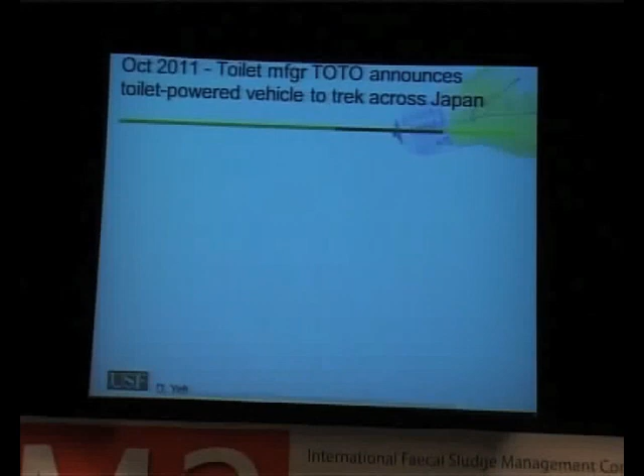And last fall, the Japanese toilet manufacturer Toto announced that they have developed the first human-powered motorcycle, if you will, that can travel across Japan. And this driver looks like he's about to make a deposit to power the vehicle. Now, is this really true? I'll get to that later.

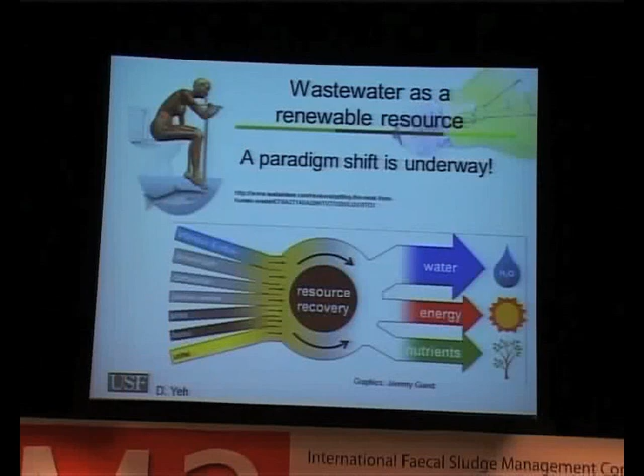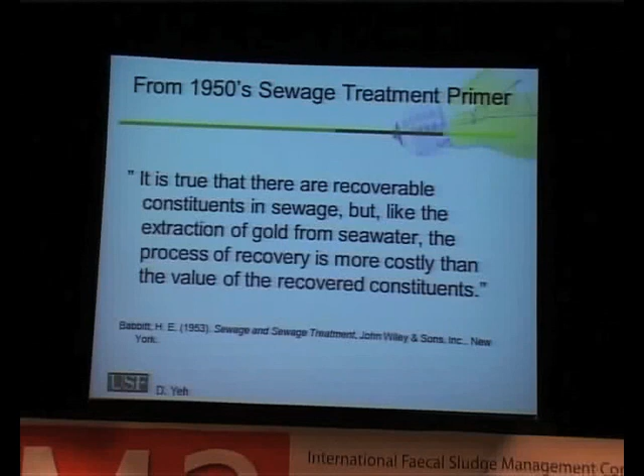Okay, so we recognize that wastewater or waste material should be viewed as a renewable material, and there's a paradigm shift that's underway, recognizing that we can harvest waste and turn that into water, energy, and nutrients. We found this in a really old wastewater treatment textbook, and it says it's true there are resources in sewage, but like the extraction of gold from seawater, it's very costly, and it's not worth it. But we'd like to challenge that assumption again, given that there are different technologies and the world's different these days.

So I think for us to achieve the Millennium Development Goals, especially related to the targets on sanitation, we need to develop different technologies, as many of us are talking about here at this conference. And here are a number of properties I think that really need to be embedded in these technologies. But probably the first one, and that's what the Gates Foundation and many other organizations realize, is that we really need to focus on recovery rather than just removal, and recognize the value that's embedded in the waste material.

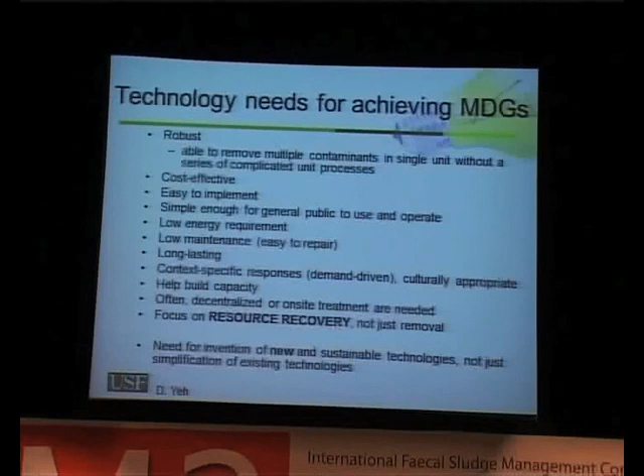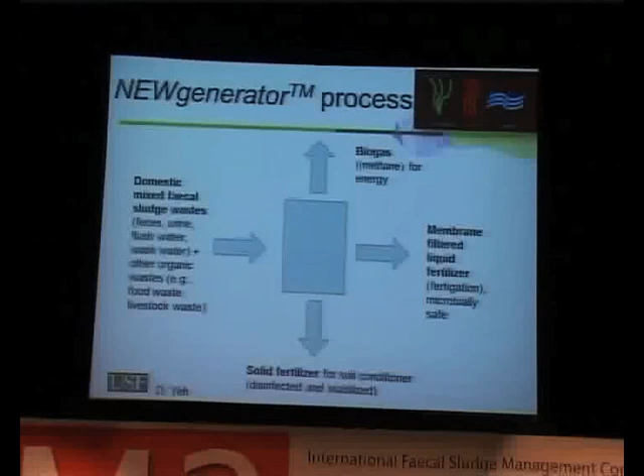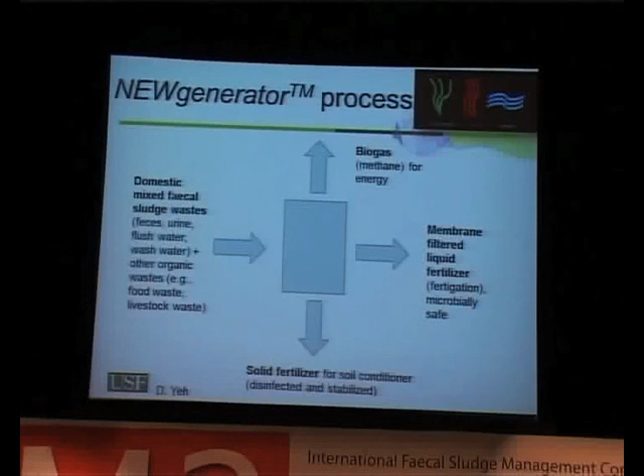So here's sort of our process in the box. What we envision is a one-step device that can turn mixed waste, whether you have pour flush or a variety of sources, you have food waste, other things mixed in, but really mixed waste from different sources. And through anaerobic digestion, you can recover biogas, but the difference is that we're going to apply membrane separation on this process. And this, I think, will be a key parameter for the process.

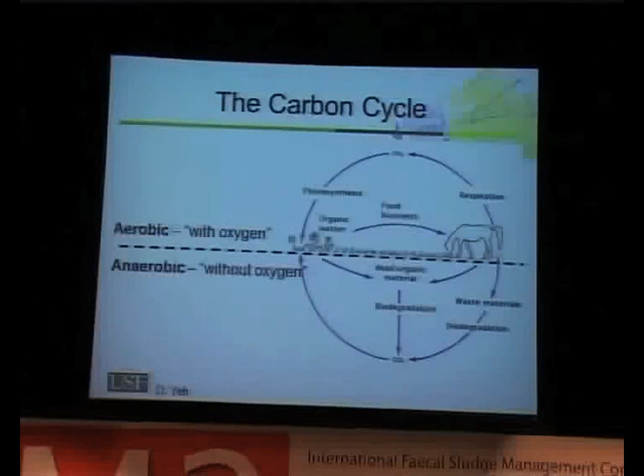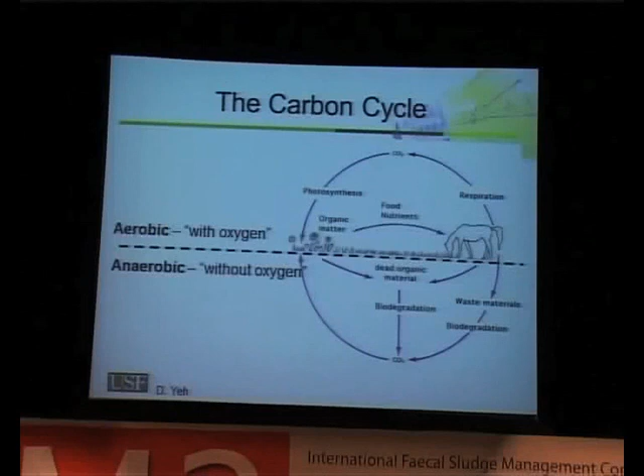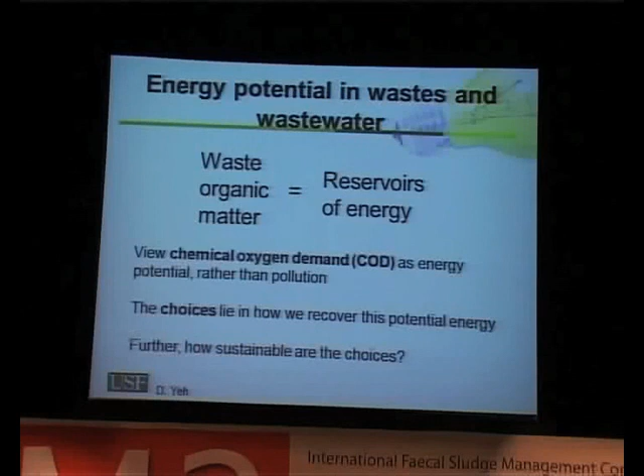Okay, so let's go back to the carbon cycle. And this is something that we learned very early on, but unfortunately, a lot of people forget. So basically, carbon goes around and around the Earth, is mediated by microorganisms, is biogeochemical cycling. And the fact is, what we consider waste is really food for a variety of microorganisms. So in nature, there's really no such thing as waste. It's all food and energy source for organisms. So waste organic matter is equal to reservoirs of energy. So this parameter that we're familiar with, chemical oxygen demand, really, the more polluted, the higher the COD, the more energy there is within waste material.

Okay, so if we look at this world of carbon, I'd like to look at methane being the most reduced form of carbon possible, and carbon dioxide being the most oxidized form possible. You can view methane as very energetically rich, whereas carbon dioxide is completely devoid of energy. And the rest of the organic world falls somewhere in between. And that could be biomass, the food we just ate for lunch, could be fecal sludge. They fall somewhere in between here.

And you see that through anaerobic digestion, we can basically convert the biomass to methane. But then there's a natural oxidation process of respiration, and it gets converted to carbon dioxide again. But thankfully, there's a mechanism called photosynthesis, which basically converts this energetically useless carbon in the form of carbon dioxide back into useful carbon, with the power of the sun. So this carbon cycle continues. I think this is really important for us to keep in mind as we're looking at technologies that can harness energy and resources.

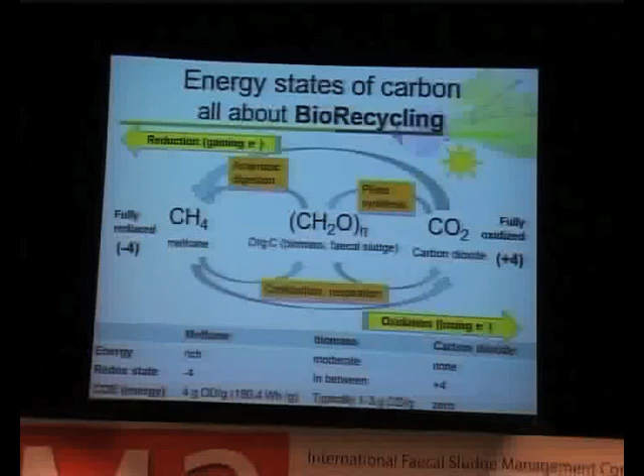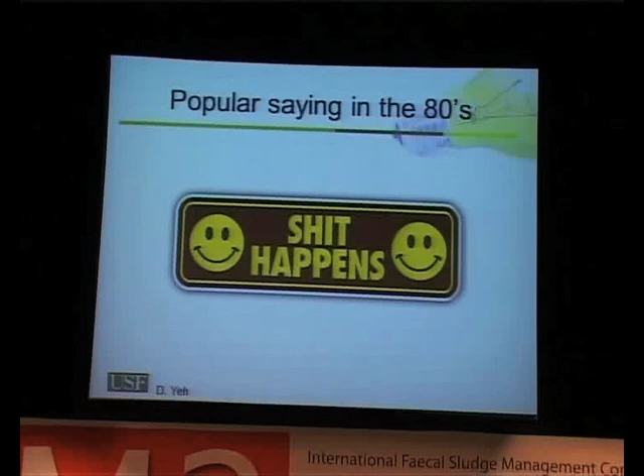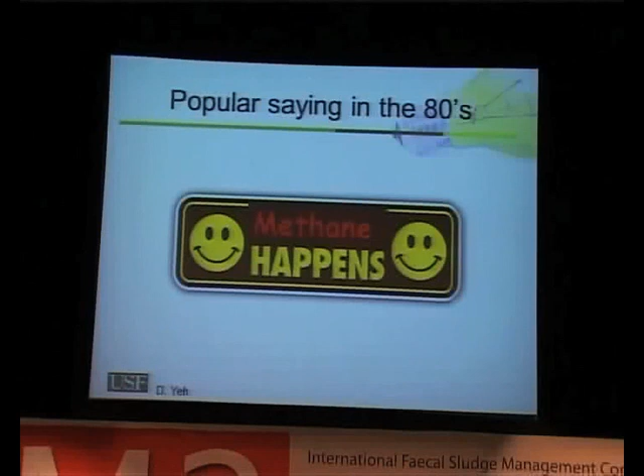Okay. So there's this very popular bumper sticker or T-shirt that floated around in the 80s, right? And I like to think that after this happens, this also happens. And so really the bumper sticker could be modified to say methane happens. That's true. Methane happens, and in fact it starts to happen within our digestive tracts, and once it enters the environment, if it's anaerobic, it continues to happen.

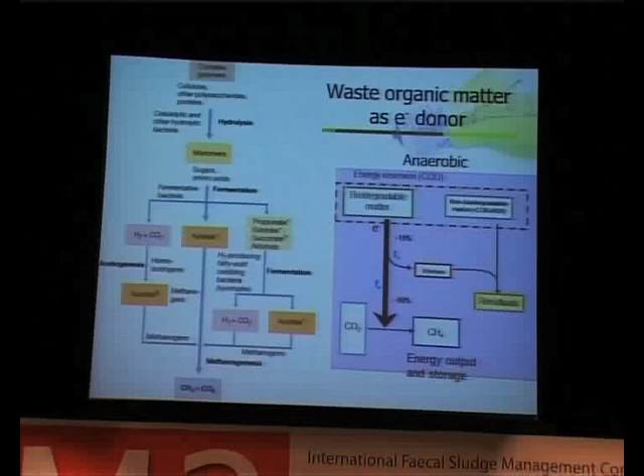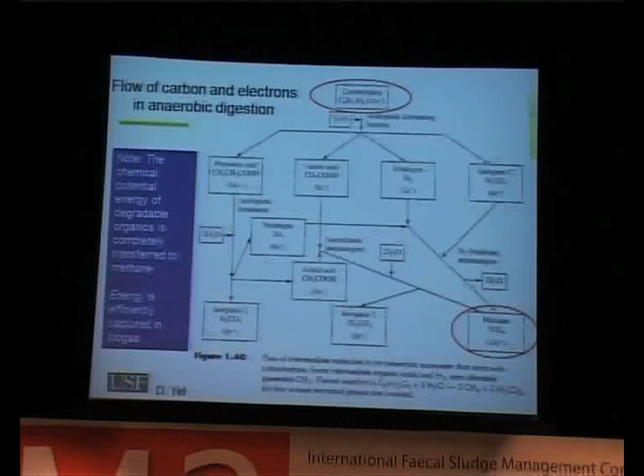And anaerobic microorganisms are very efficient at converting organic matter into methane. And compared to aerobic organisms, they have very little cell yield, so they're very unselfish. They take a very low commission, if you will, to build biomass. They convert about 90% of the energy into methane. If we're looking at energy recovery on an electron basis, for every bit of biodegradable organic matter, we get all of the electrons back, eventually in the form of methane. So, when we're looking at technologies, anaerobic digestion, methane production is something that works well.

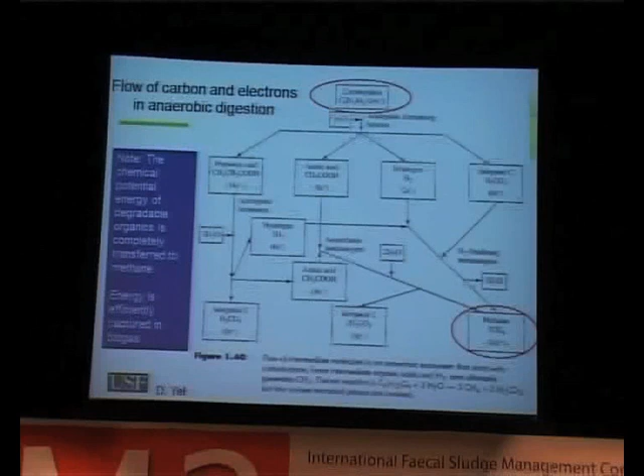There's a saying, if it ain't broke, don't fix it, right? So let's look at anaerobic digestion and say, well, what can we do to make that better? In terms of the energy content of wastewater waste, municipal wastewater in the United States is relatively dilute, so the energy content is limited. However, fecal sludge with a high solids concentration would be a lot more energy rich. Of course, the more COD you have, the more energy embedded.

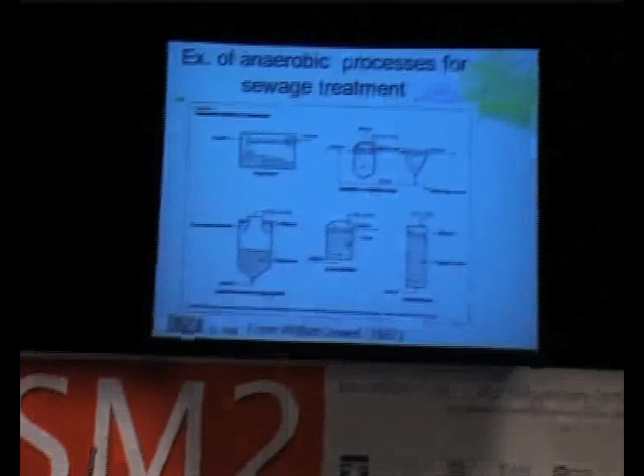And a variety of anaerobic wastewater treatment processes have been in existence for a long time, which you're familiar with. In India, there's a large public toilet, in fact, that converts human waste into biogas, and then biogas used for cooking, or lighting, or also electricity. So here's a good example of turning waste to energy via biogas.

But what are the limitations of anaerobic digestion? Well, one of them, I think, is related to the reuse of the effluent from anaerobic processes. If you're relying on gravity settling, gravity separation, which many processes do, there's an inherent limitation that anything that's at density close to water, such as colloidal material, or microbes, or bacteria, or even helminth eggs, could leave the system, and we can't capture those through gravity-driven separation systems and anaerobic digestion. So that puts a limit on what we can do to safely reuse the effluent from these systems.

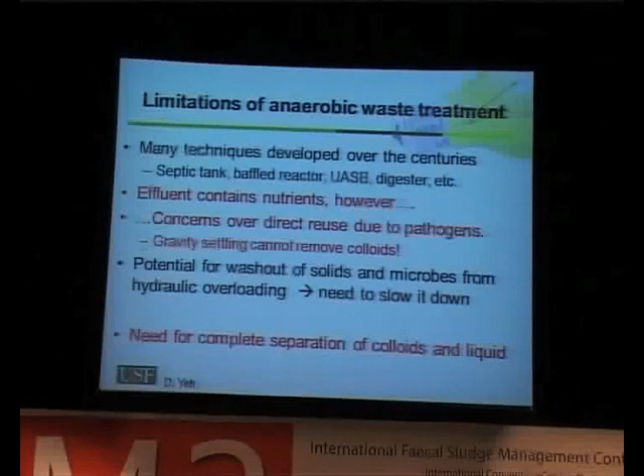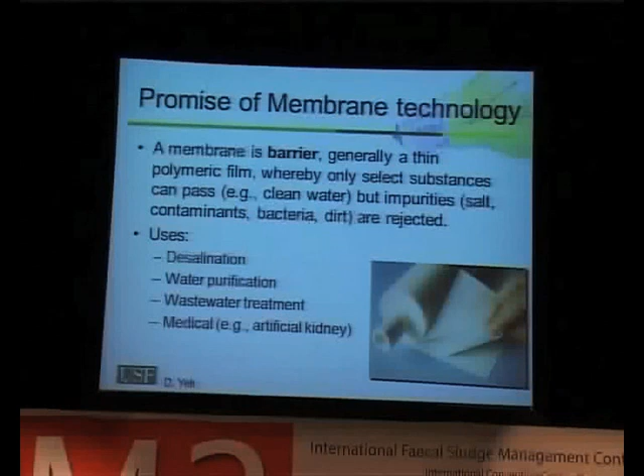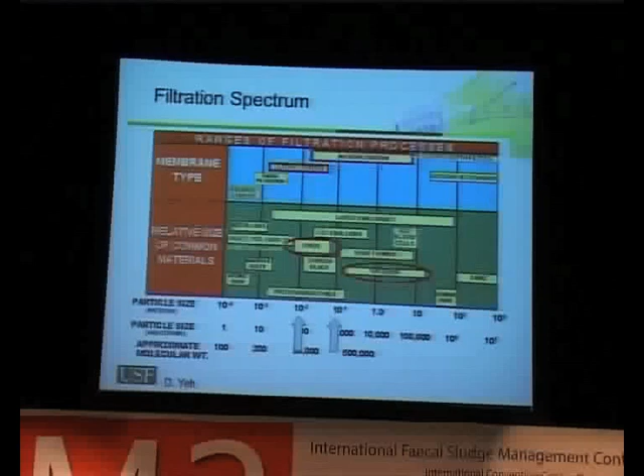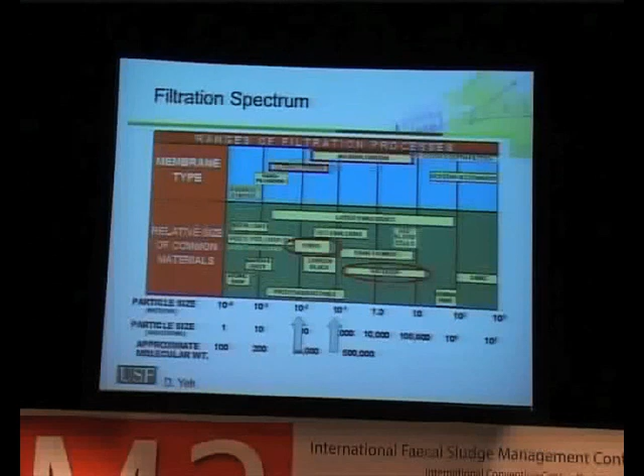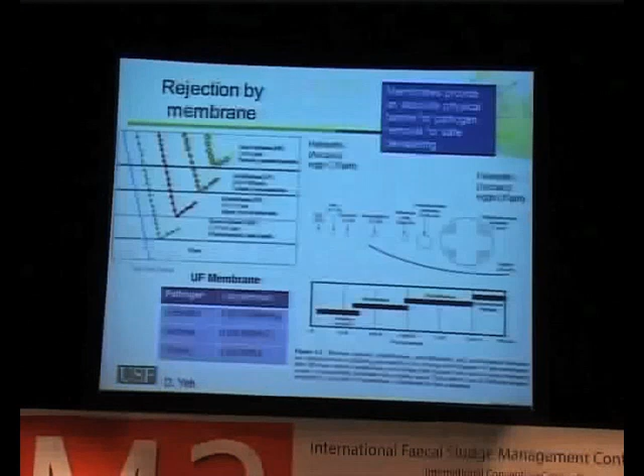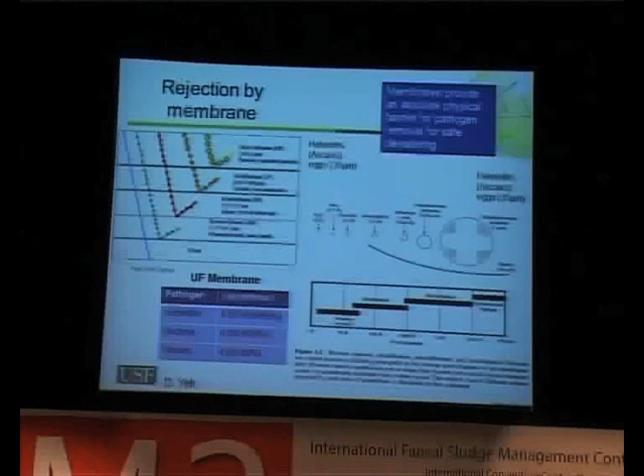Looking at it a little bit differently, this is basically the same information, but presented in terms of the different types of filtration, what they can reject. The top one on the graph on the left shows microfiltration on top, and then ultra, nano, and then the reverse osmosis. Well, the average size of a helminth egg is about 35 microns, and that can be easily rejected by microfiltration. But beyond that, we can also reject bacteria and viruses. And one thing that's very interesting is also when membranes are put in use, the pore size sort of tightens, if you will, because of the covering of the membrane surface with biofilms. And that's a research area that's ongoing now. That we can get even additional removal with the membranes that are in operation.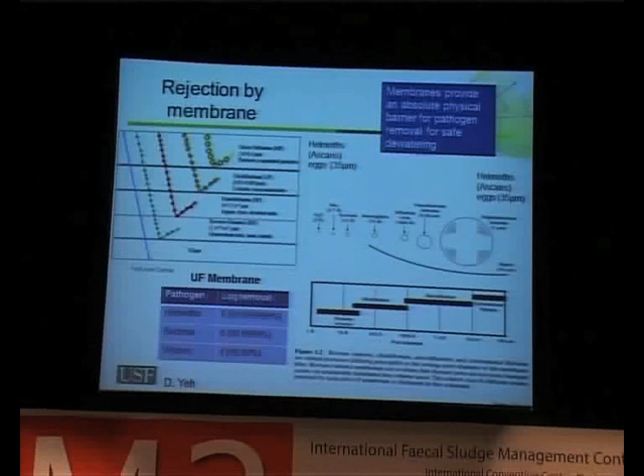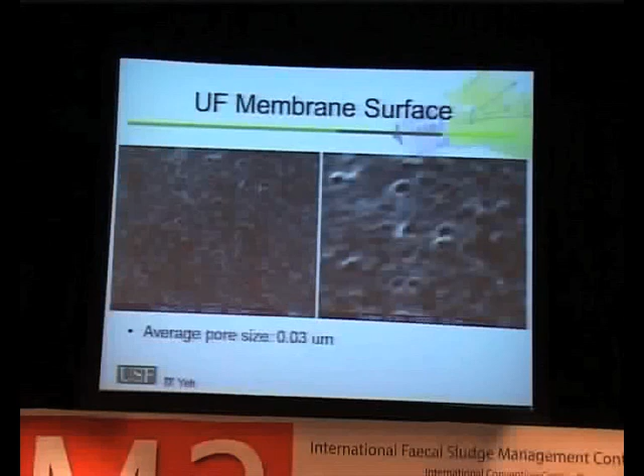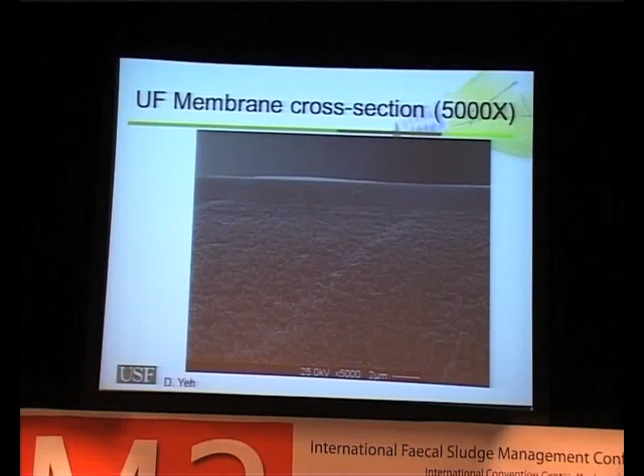Here's an example of the membrane surface of the membrane that we're using. You can see the pore size in images from the scanning electron microscope. Average pore size is 0.03 microns. You can look at the membrane surface with atomic force microscopy, showing the roughness on the membrane surface. And here's a cross-section of the membrane. You see on the very top, that's a separation layer. It's a very dense layer, and then the pore is going to open up. That's to allow water to go through once it makes its way through the top layer of the membrane. So membranes are very robust, very flexible systems. They're highly scalable. They provide this absolute barrier for the rejection of a variety of undesirable contaminants.

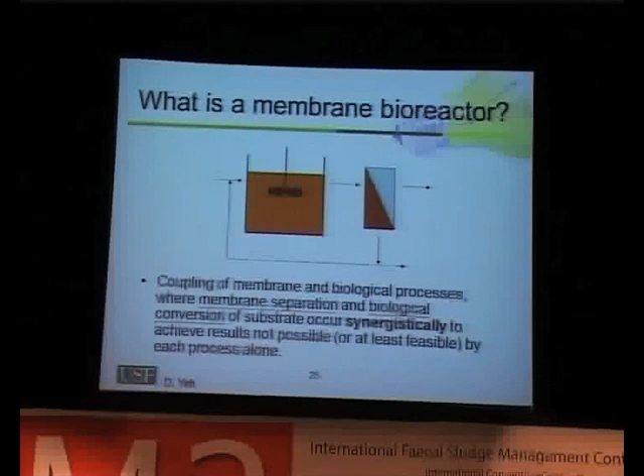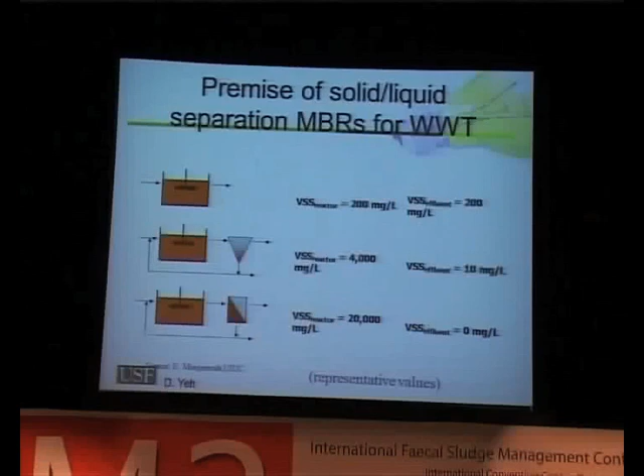So we can combine membrane with a bioreactor, a biological process, right? That's what we would call a membrane bioreactor. So what do you do with a membrane bioreactor? If you start with a CSTR, or a completely stirred-tank reactor, and this could be, for example, a fecal sludge pit, whatever goes in, if it's complete mix, is what comes out. So there's very little differentiation or separation for contents. Of course, we can add a clarifier, a gravity-driven clarifier to that. We get some separation. But as I noted previously, that colloidal material will not be able to settle within such a system. But if we apply a membrane system, now we're going somewhere. We can get basically 100% removal of solids. Not to mention that we now can create a wastewater treatment system that is very compact. For example, we can replace this entire wastewater treatment train with really a small one-step system. And there's a number of applications to the membrane bioreactor systems, MBRs. Some of the issues are related to energy and maintenance of these systems, and I'll get to that more in a minute.

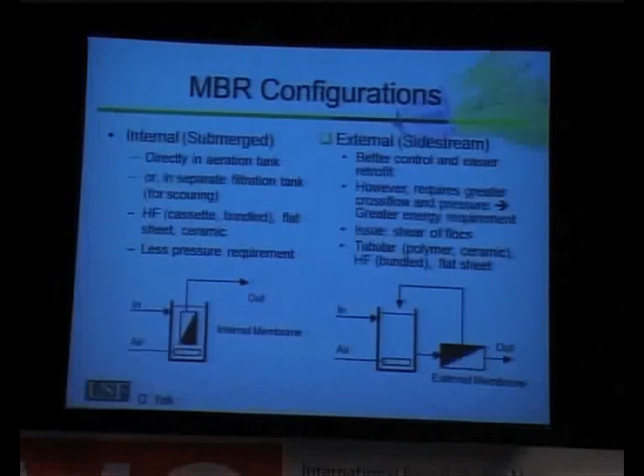So where do you put the membrane? You can either put the membranes inside the reactor, and these are submerged configurations, or you can put them outside, external configuration. Right? Keep in mind what I've spoken so far about membrane bioreactors really are related to the aerobic systems. These are basically activated sludge systems adapted to using membranes.

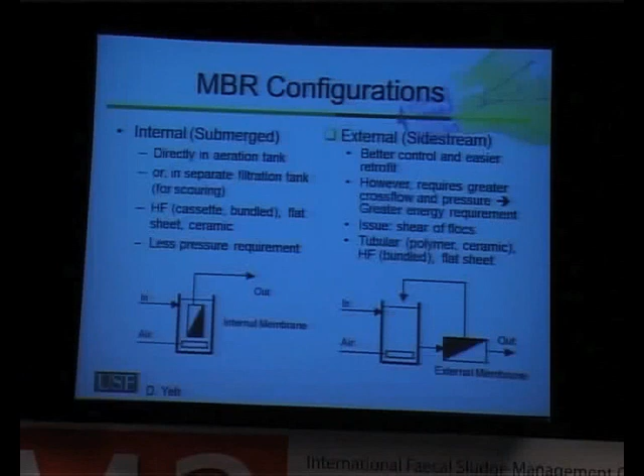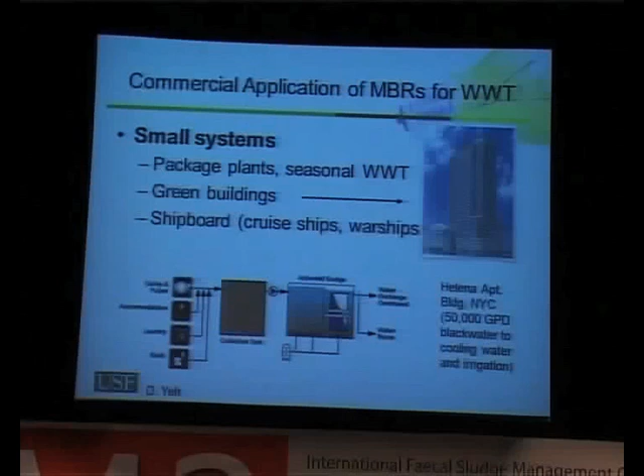What we're interested in working on is an anaerobic membrane bioreactor. Membrane bioreactors have really penetrated the commercial marketplace. These are systems that are in commercial use. There are a variety of companies that provide these services. They're small systems. You can use them even inside buildings.

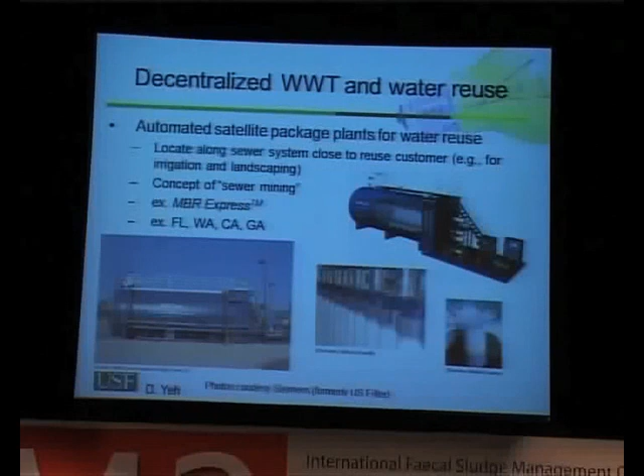There are a variety of green buildings that recycle the building's wastewater and convert that into reusable water within the building. We can even use these on ships, for example. There are cruise ships that use membrane bioreactors to turn all the wastewater into usable water. So these are basically systems that are high performance, small scale, and can provide a high quality effluent that can be reused. Some of the top uses have been, for example, sewer mining, to mine water from sewers.

There's a lot of excitement around membrane bioreactors, and this one came from, I believe, 2004, from the Water Biotechnology magazine. They're very excited about membrane bioreactors, and asked the question, can MBR solve the world's water crisis? This is a summary of a meeting with a number of wastewater experts. They identified that MBRs have a lot of potential, and in blue are the benefits highlighted. They provide really high quality effluent. There's reliability. It's a good use of land because they're compact, and they're very adaptable.

They're small systems. But what are the issues with MBRs? If we want to make these actually a solution in the global water and sanitation fight, what are the issues? Well, cost. These tend to be expensive systems, requiring a lot of components and a lot of know-how to run. There's a chemical cost to clean the membranes, an energy cost to run the membrane system and the bioreactor system, and also a general lack of familiarity with the system.

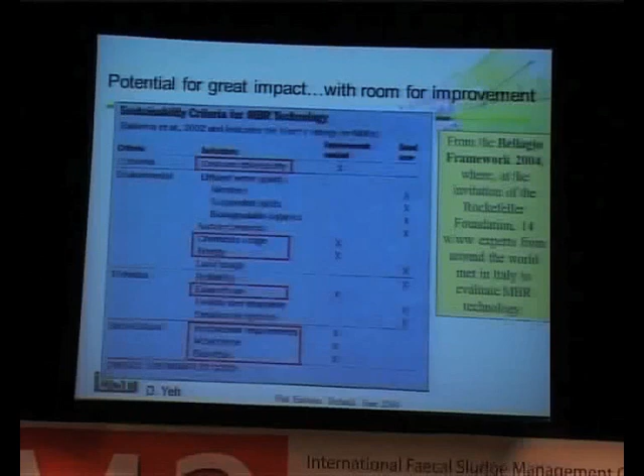This has basically provided the motivation for the work in my research lab for about the last 8 to 10 years, basically this table. If MBRs have such potential to help solve the world's water crisis, are people really looking at these issues? Unfortunately, I think most of the marketplace has been going towards users who can afford MBR systems. What has been sorely neglected is the sanitation market in developing countries, and commercial vendors are not targeting that sector. I think that's a shame, that we have such a wonderful technology but it's not being applied to help solve global sanitation problems in the developing country context.

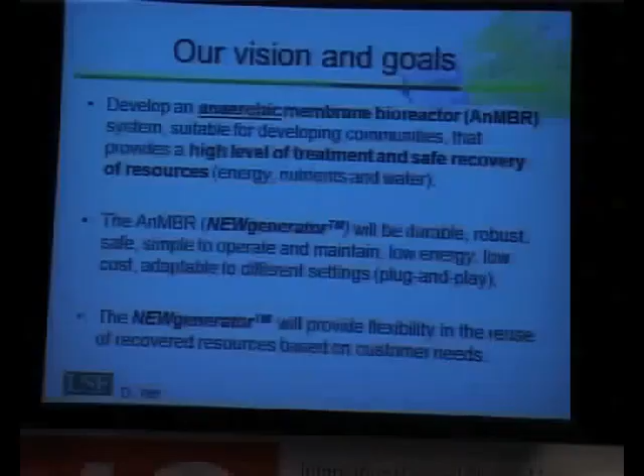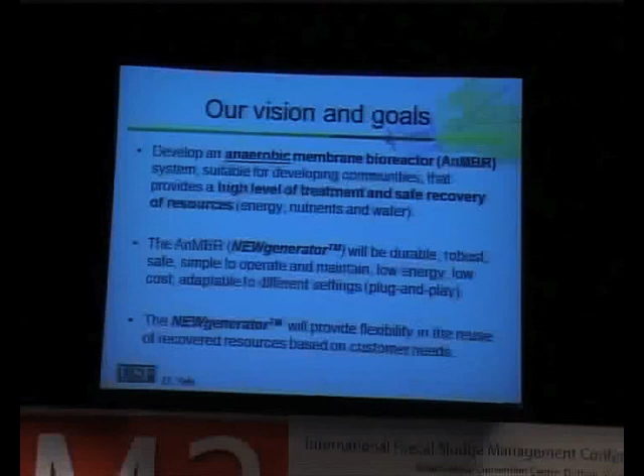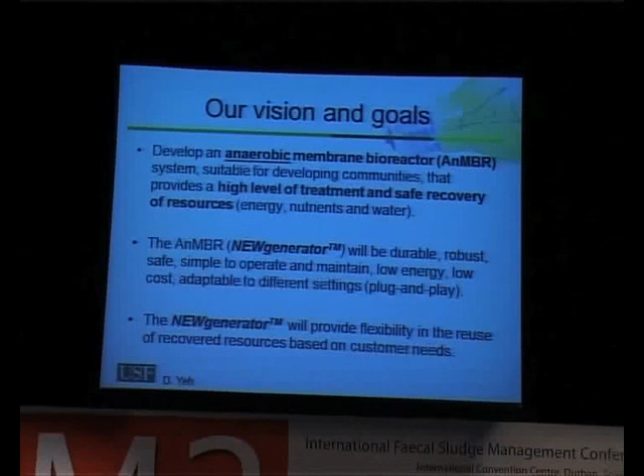So what we envision is that we'd like to develop an anaerobic MBR system that's appropriate for resource-limited settings. The reason we want to do this anaerobically is for the energy reduction in an anaerobic system, and also for the energy recovery aspects. The trademark name we have applied to our system is the NEWgenerator, and we envision that it will be simple to operate, low energy to maintain, and adaptable to different settings. We can adapt to different energy sources that are available, or even be completely off the grid. And the recovered material resources can also be flexible depending on what the user needs.

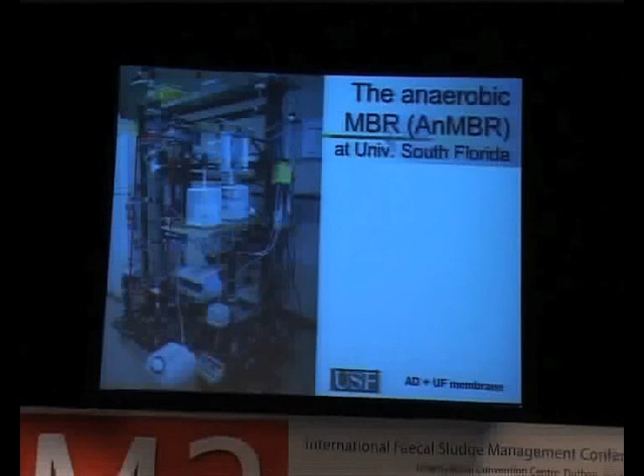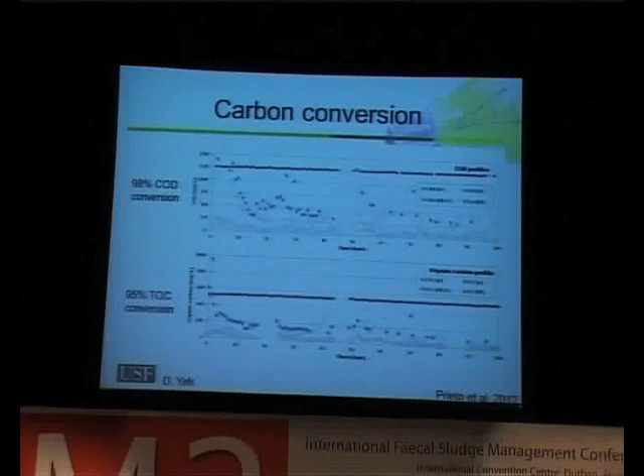This is a laboratory system that we have constructed and tested, and it's basically an anaerobic bioreactor coupled with a membrane separation system. Without going into all the details of the graphs, what I want to show you is that the membrane system coupled with the anaerobic process is able to achieve really high quality effluent in terms of carbon removal. We're able to get 98% COD removal in such a system, so it's a very efficient conversion into methane.

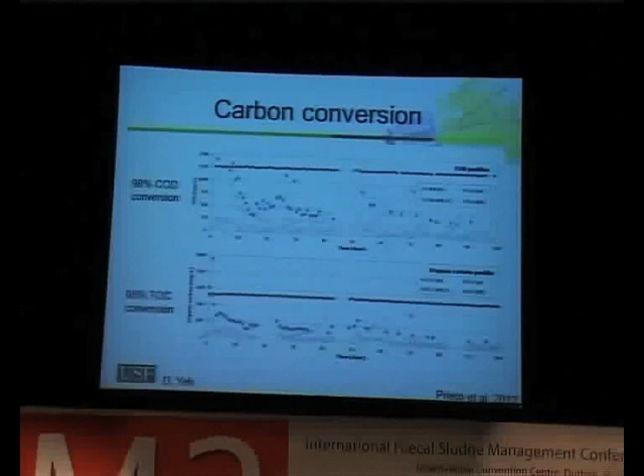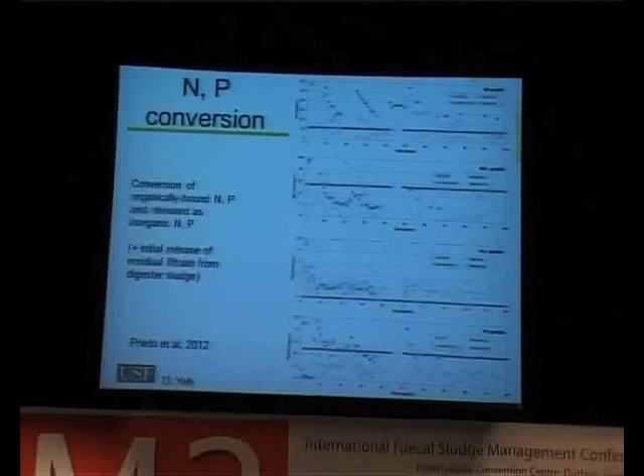And then what about the nutrients, nitrogen and phosphorus? Anybody who's familiar with anaerobic digestion knows that it does not remove nutrients. In fact, if your target is to discharge your effluent into a receiving water body, you would not be doing anaerobic treatment; you would need to follow that with something else. But if your target is conserving the nutrients, so you want to leave them in the effluent, and you want to liberate them from the solid material where they are organically bound, while overcoming the pathogen issue, then I think anaerobic MBRs can provide a very safe effluent for you to use. In fact, we're able to recover 90+% of the nutrients that are bound up within the waste solid material in the system.

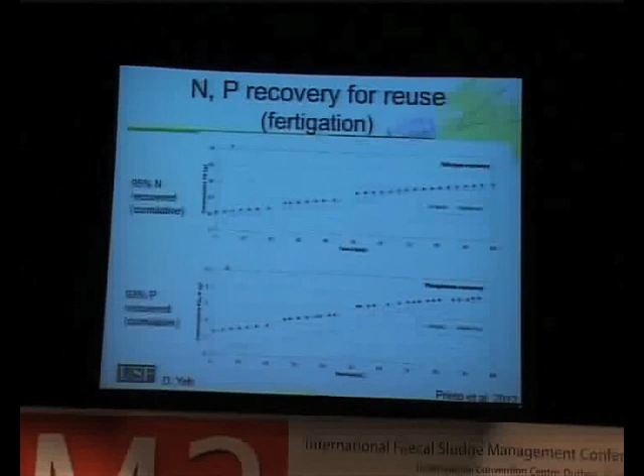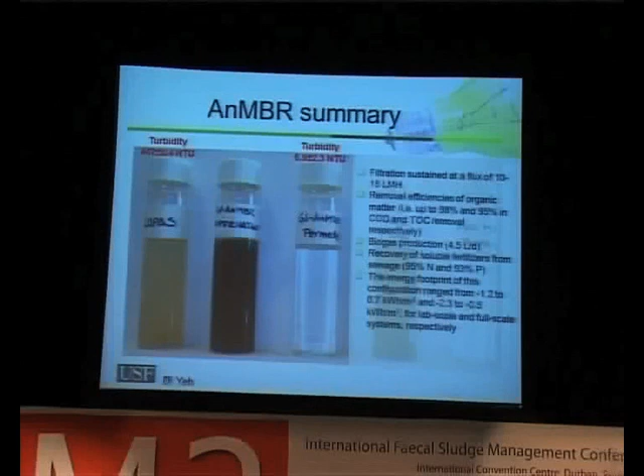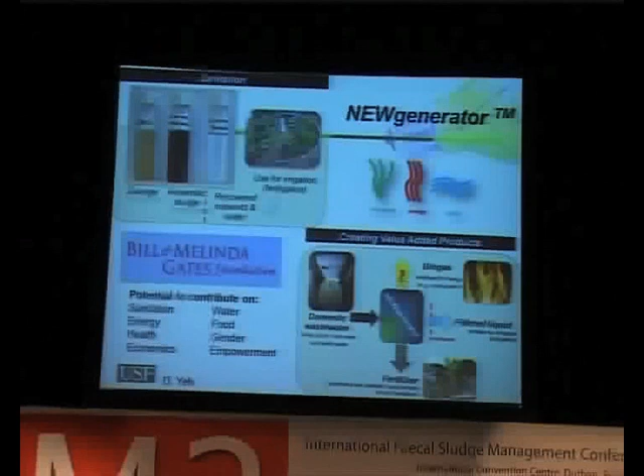This is what we envision, and we have a Gates Foundation grant, a round 7 phase 1 grant, to develop the system for the field. We envision our NEWgenerator recovering the resources, and rather than getting rid of nutrients, let's use the nutrients and the water together for agriculture, which is one of the large uses of water in the world anyway. And then the biogas that you can capture from the system can be used readily for purposes such as cooking and heating.

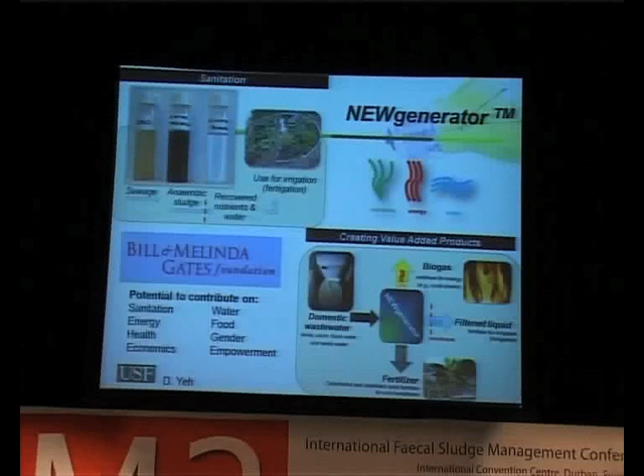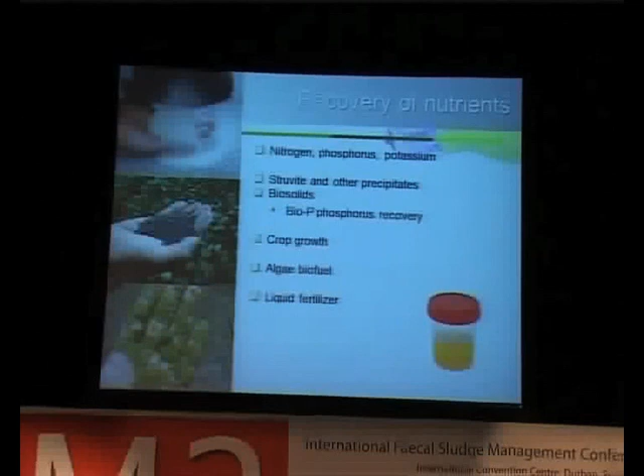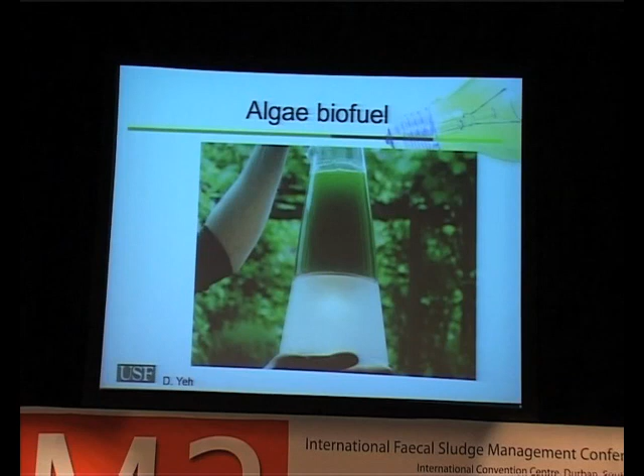And the nutrients that you recover, you can either use to grow crops. You can maybe precipitate struvite from them, and so if you can't use it readily, you can package it as a solid fertilizer. Or the other thing you can do with it is to grow algae for biofuel. And there's a lot of interest in this topic now, and people recognize that there's a lot of synergy between algae and wastewater. In order to grow algae sustainably, we really need to grow on wastewater, because it doesn't make sense for us to pump groundwater and add bags of fertilizer to it. So there's great synergy between the two.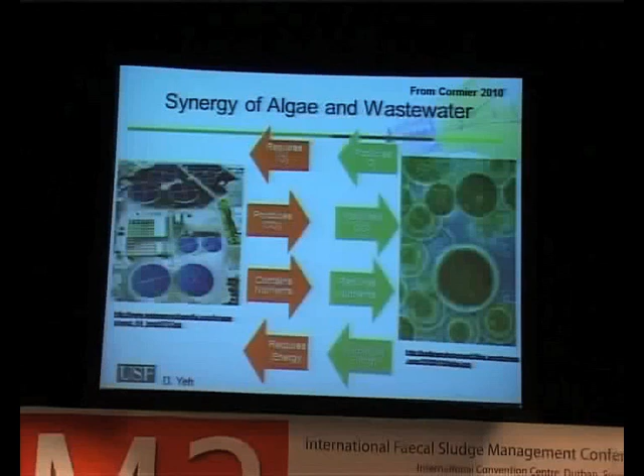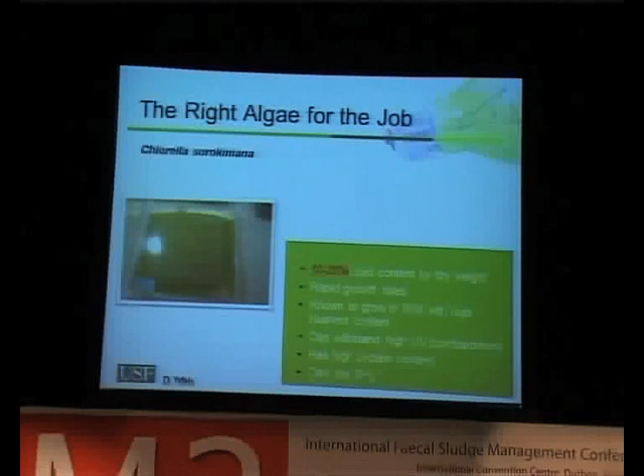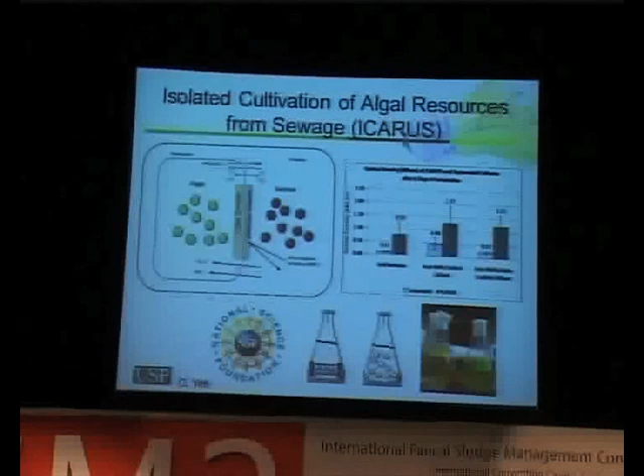In fact, that's one way we can extend the usefulness of the nutrients in the wastewater, and basically add additional carbon back in from the atmosphere. If you come back to this picture, algae allows us to take useless carbon dioxide and turn it into new energy sources. We've looked at a variety of species in the lab. Some of the species are chlorella species. They work very well, and these are some examples of photobioreactors we built in the lab. We're coupling this project with a project from the National Science Foundation, basically to look at the integration of algae in the wastewater treatment system.

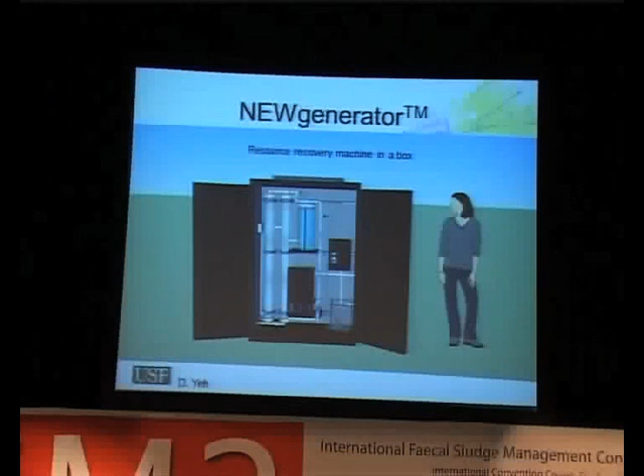Okay, so this is what we envision for the NEWgenerator, resource recovery machine in a box. This would be what the system might look like. One of the things that we're doing is that we feel it's very necessary to combine research with education and practice. You can't do research in a vacuum. So to that extent, there's a lot of student involvement coupled with the local K-6 school. And basically, we're pilot testing the NEWgenerator using the septic tank at the school.

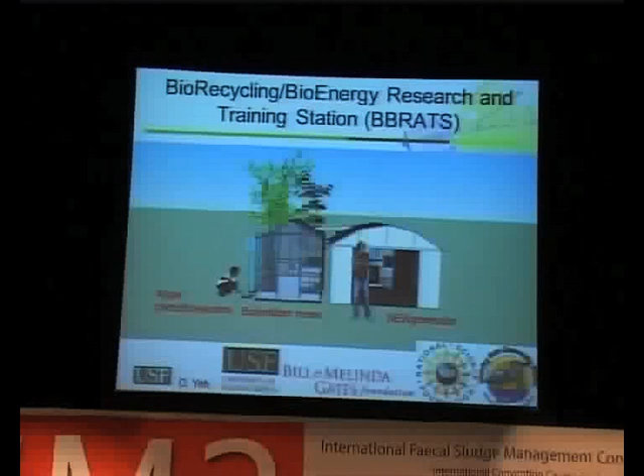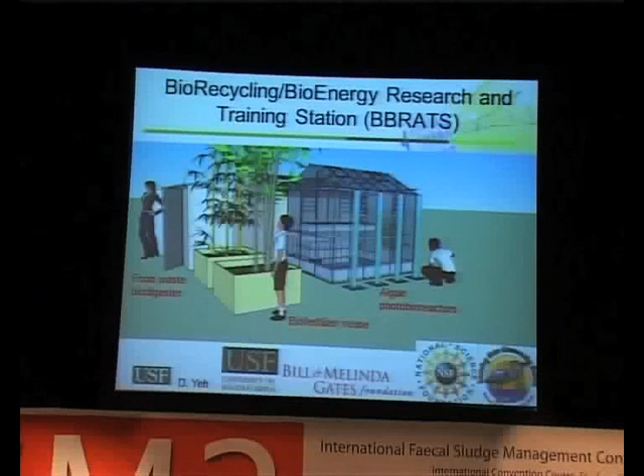And what we have developed at the school in combination with 2 other projects, the NSF project and also the food waste project, is a station that we call the Biorecycling, Bioenergy Research and Training Station, BBRATS. And these are some of the students who are working on the project. And here's some rendering of BBRATS. So basically, we have a NEWgenerator station, fertilizer reuse, algae photobioreactors, just taking different angle views of the system, food waste digester. So really a complete demonstration of biorecycling and coupling this into curriculum.

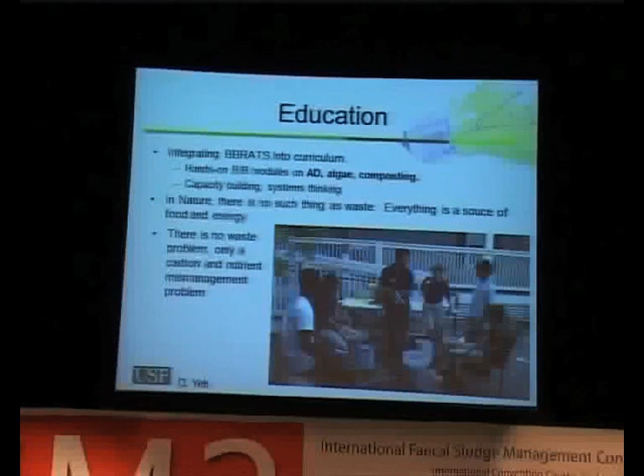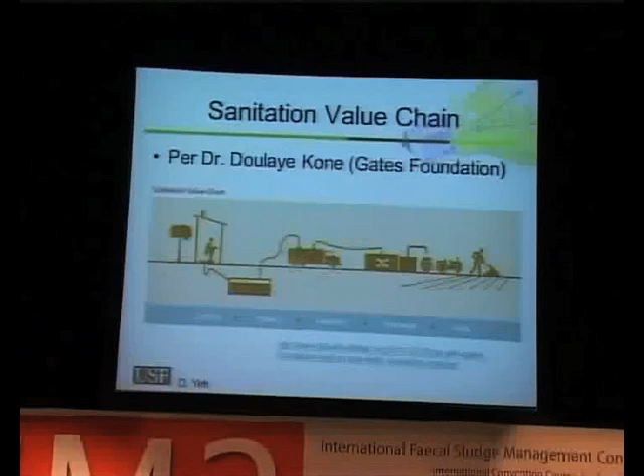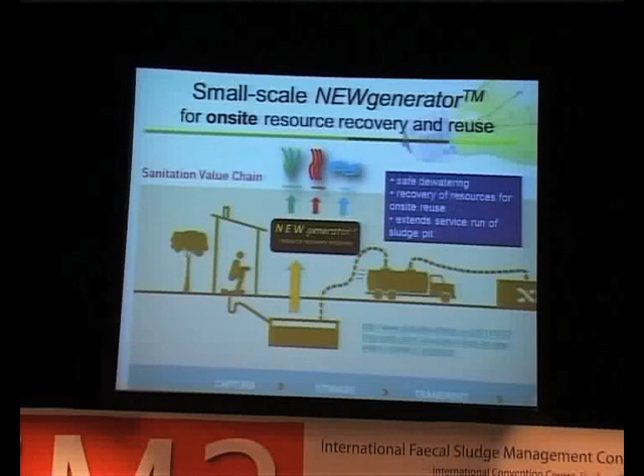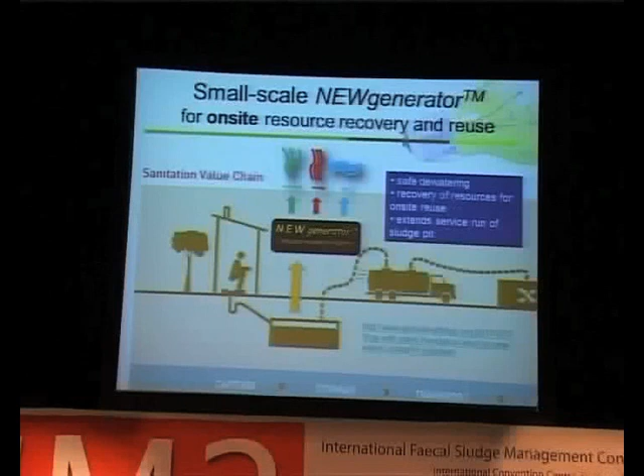And so the last thing I want to end with is, we saw this slide yesterday from Dr. Kone about the sanitation value chain. So, where would a NEWgenerator possibly fit in? One is, for example, the faecal sludge pits. We heard a lot of talks about the pits filling up in no time and causing a lot of problems. Well, what if you can couple this with a safe dewatering device, such as a NEWgenerator, and you can basically dewater the system, and you can harvest the water and the nutrients in there in a safe manner, and then do local reuse, for growing crops or other things. That can basically stretch out the useful time for the sludge pit.

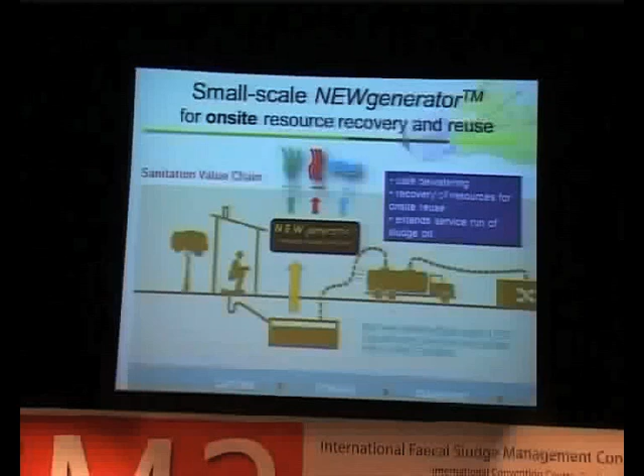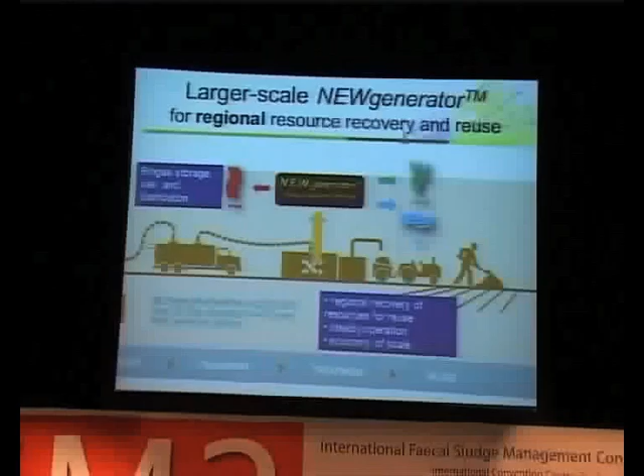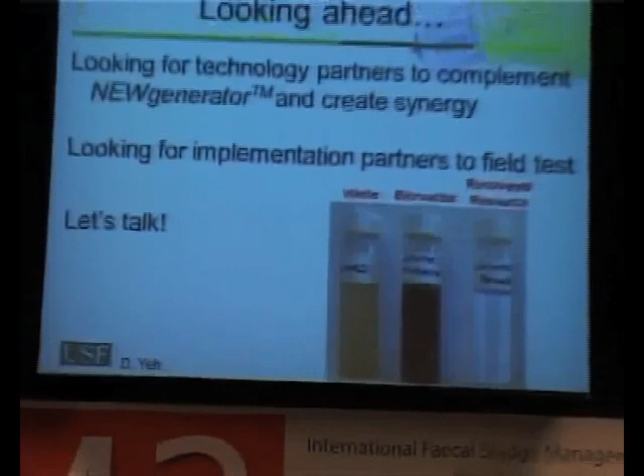Now, once the contents have been emptied and conveyed to a resource recovery facility, a larger scale NEWgenerator could be implemented there, basically to do larger scale recovery. Right, so with a membrane system that's flexible, adaptable, and scalable, we're looking for technology partners to complement our process and basically create synergy from this. We're also looking for implementation partners to field test our system. And so if you're interested or just want to have a better understanding of the system, I'd love to talk to you. Okay, so coming back to this picture, it turned out to be a publicity stunt.

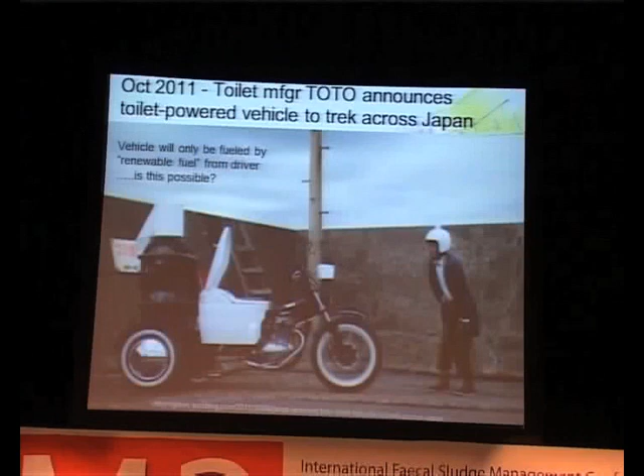It wasn't really human waste in the toilet, but basically this is a biogas motorcycle with a toilet tank installed. But it does raise a lot of interest and conversation about how you can effectively use biogas for a variety of things. But maybe in a not too distant future, we could have a system like this, where it actually in real time gets converted to energy, so you can have off-the-grid toilets, sort of like what the foundation is envisioning with the Reinvent the Toilet challenge.